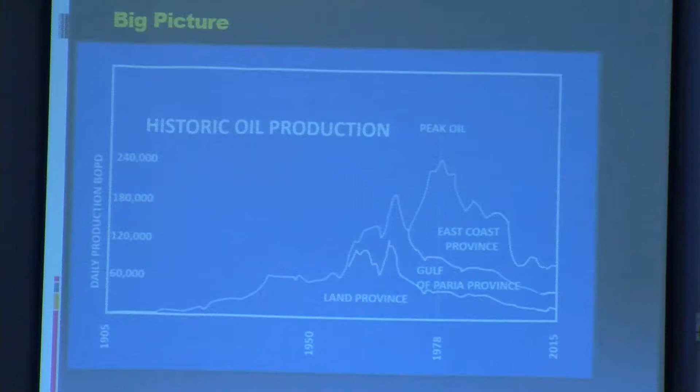But you will see here the latest ministry figures for production in February: 75,500 barrels of oil, of which land produced 22,000, right? Total marine, 53,500, of which Trinmar produced 19,000, and other marine was 34,000. Now, 16,000 of that other marine was condensate. So, in fact, actual black oil production was of the order of 60,000 barrels a day.

Now, if you go back to that decline I showed in the previous curve, and look back just two years, you'd see that in the last two years we've lost 6,000 barrels a day on average, right? So that means that, assuming the same decline rates and we continue business as usual, BAU, in five years' time we're going to lose 15,000. In fact, I hazard a prediction that it'll be far worse than that.

So if you think we're in a crisis today, and we are, what will be our condition four or five years out, right? We will have nothing to leave to our children, and we will have nothing to offer all the young people who are sitting in this room looking for opportunities, not only in the business, but in the country. So we need to do something, and something urgent, right?

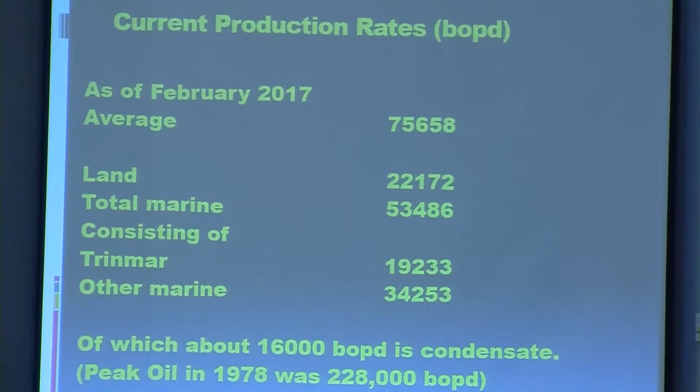Our fields are all mature. Land fields in particular are all mature. Dates of discovery, 1908, 1918, right? So we have to look for technologies which address the mature fields. My presentation will not discuss marine oil fields on the East Coast, right? I will be talking about land and the Gulf of Paria specifically, because that is where our immediate EOR or IOR opportunities will lie.

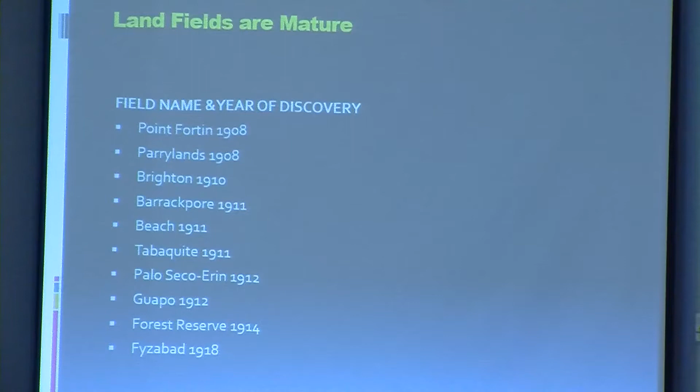And if I use EOR and IOR interchangeably, I'm an old man, and I do not want to get into the semantics of the difference between those two. So please forgive me. As far as I'm concerned, they mean the same thing. Okay?

Now, this is a slide from a presentation we did several years ago, and it is still true today because the numbers have not significantly changed. On land, we have produced to date about 1.5 billion barrels of oil, and I'll show you a little bit of a breakdown of that, right? Gulf of Paria, about 1 billion, and I'm not too worried about East Coast, but total production of oil from Trinidad is about 3.5 billion barrels of oil to date.

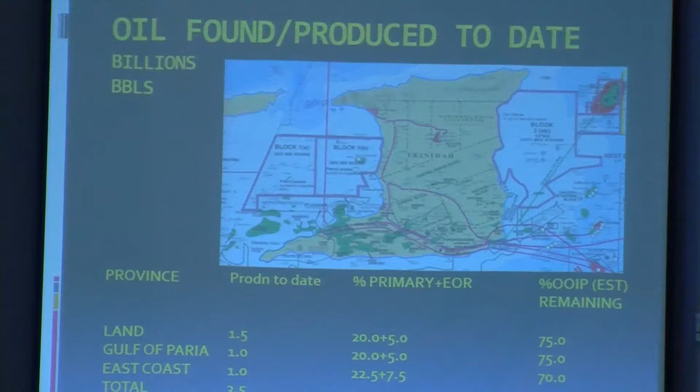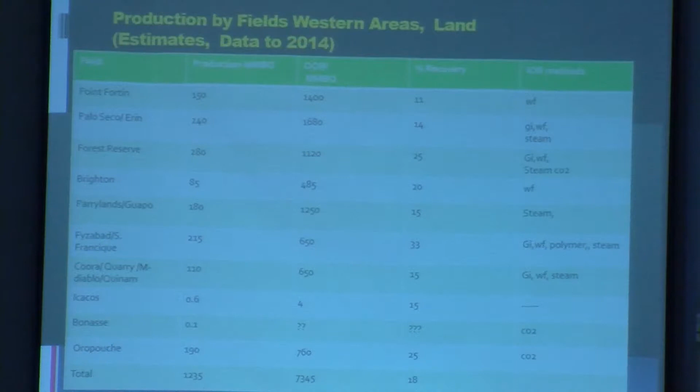And so I'm looking at the western area fields here. Western area fields, and you will see Point Fortin, Palo Seco, Forest Reserve, Brighton, Parrylands, Guapo, Fyzabad, San Francique, Coora, Quarry, Morne Diablo, Quinam, Icacos, Bonasse, Oropouche, right? And our production from those areas amounts to about 1.2 billion barrels, okay?

Our average recovery is about 18%. Some places are higher, some places are lower. And in many of these fields, IOR, efforts to improve recovery, either secondary or tertiary, have been tried. So for instance, in Point Fortin, there was water flooding. In Palo Seco, gas injection, water flooding and steam, right? Forest Reserve, gas injection, water flood, steam, carbon dioxide, et cetera.

Fyzabad had gas injection, water flood, even a pilot polymer flood scheme many years ago, steam injection, and so on, right? In Bonasse we had a pilot CO2. There is a pilot CO2 there, and in Oropouche there was a project as well, right? So we have tried some stuff. Some of these things have worked very, very well. Gas injection worked brilliantly, right?

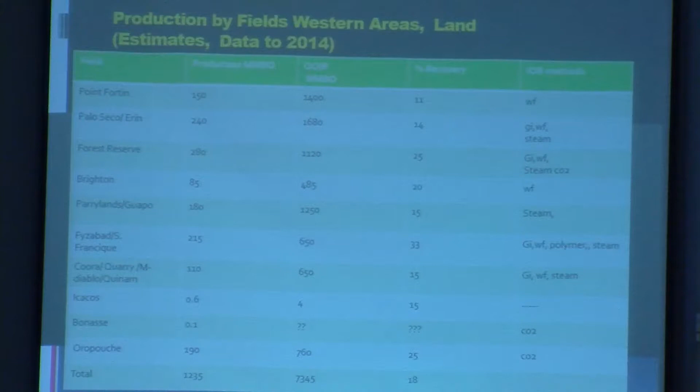When we had gas in abundance to essentially throw away, right? Steam has been, as in the rest of the world, and I'll show that later, extraordinarily successful for Trinidad, right?

Overall recovery is about 21%. What this means is that in both areas of land, we have close to 80% of the original oil in place still. So if we have produced, say, 1.5 billion barrels from land, we're talking about a considerable amount of oil still in the ground available for improved oil recovery.

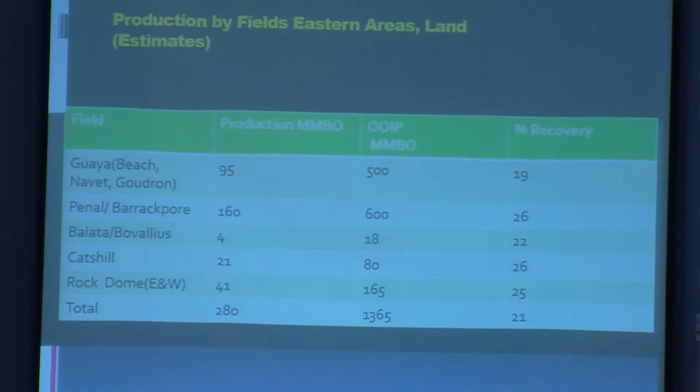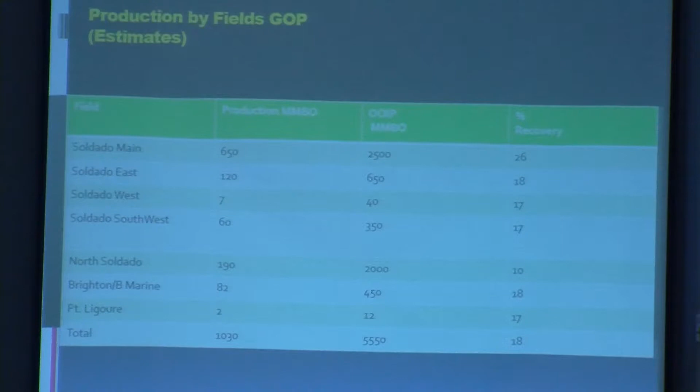Of significance is that most of our oils are, I will say, not asphaltenic. And that is of great significance to EOR. Asphaltenic oils tend to oil-wet the reservoir, first of all. And when we talk about CO2, CO2 deposits asphaltenes in the reservoir if the oils are asphaltenic. So we will have to screen reservoirs for that if and when we have them. We have the capability to do so.

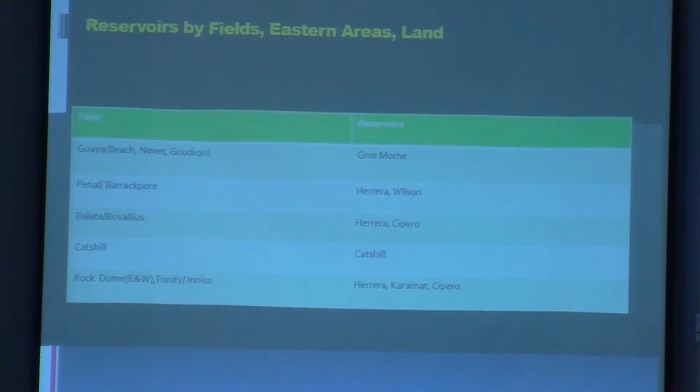As we expect, the oil API gravities will increase with depth. In general, in the deeper reservoirs, the API gravities range from the upper 30s to the mid-20s. That's just a sweeping statement, and that has implications for the types of EOR that you might want to implement. And in the shallower reservoirs, the oils range from the mid-20s down to about 15 degrees API, or even slightly lower in some cases.

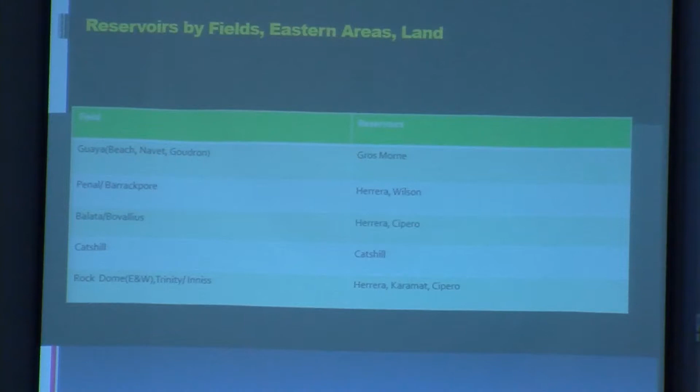I want to talk about the reservoir types, land and Gulf of Paria. Generally, the reservoirs are sand with varying extents of shaliness, and the sands are interbedded with thin layers of shale. That interbedding has implications for the type of EOR techniques that you might try. For instance, there are technologies which require good vertical permeability. If you have interbedded shales, you may have a significant net sand thickness, but not much vertical interconnectivity, which will preclude the use of certain technologies.

Most sands frequently shale out within relatively short distances, in terms of international style reservoirs that extend for thousands of meters or feet, or in some cases miles. And the consequence of that is there's some uncertainty in terms of interwell connectivities.

The shaliness in the sands is generally of the smectite family, with illite occurring in some cases, right? Very little kaolinite, if any at all, right? There are implications in terms of the technologies that can be applied if one is dealing with smectite type clays in reservoirs, and/or illite, as the case might be.

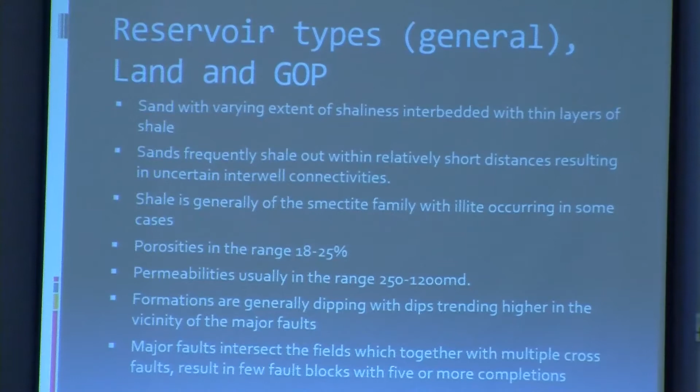So the implications for IOR: fluids injected need to be compatible with the shales in the formation and with the reservoir fluids. Interwell connectivity and reservoir continuity need to be established and tested continually by diligently monitoring injection and production performance, and adjustments must be made as needed on a timely basis for effective IOR performance.

This is grunt work. This is hard work. And if you're not prepared to do that, your IOR projects are doomed to fail from the start. This is not sexy stuff. You've got to be out there taking your measurements, testing your wells, and interpreting the results in the office, right? And you have to do both. More than likely, the same person has to do both, because things get lost in the translation from field to office. And if you don't see these things with your own two eyes, do not believe it.

Again, because we have small fault blocks, single well methods are favored. For example, push-pull for testing connectivity, and there is a side benefit to single well methods in that you tend to get fast returns on your money, right, in terms of production.

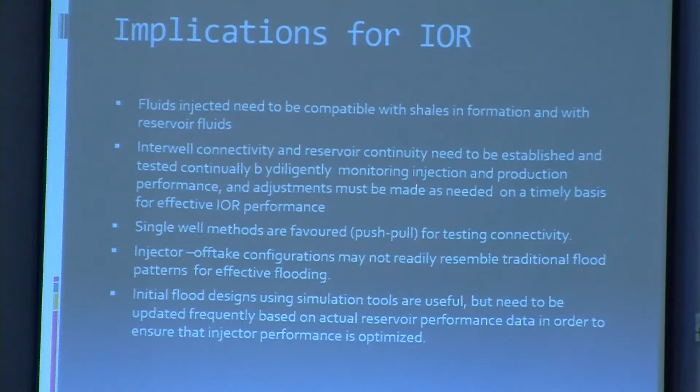All right, okay. In that case, let me close this one and open IOR Methods.

Kippy, Donnie, give me a glass of water, please.

Okay. Here we'll talk a little bit about EOR methods. And this is something that I teach a semester-long course on, or have taught semester-long courses on. So to think that I will cover this in 20 minutes and do justice to it is being exceedingly optimistic, right? Necessarily, this will be a cursory view, but there are some points I want to make coming out of this talk.

So you can't see this as well as I had hoped you will, but we're talking here about chemical methods, thermal methods, and essentially methods using gas, which could be miscible or immiscible. So right down at the bottom, which is recovery methods, right? Secondary or tertiary recovery, we're talking about chemical, thermal, or gas methods. And just above that is secondary recovery, which uses either water flooding or pressure maintenance, which is essentially injection of natural gas into the formation.

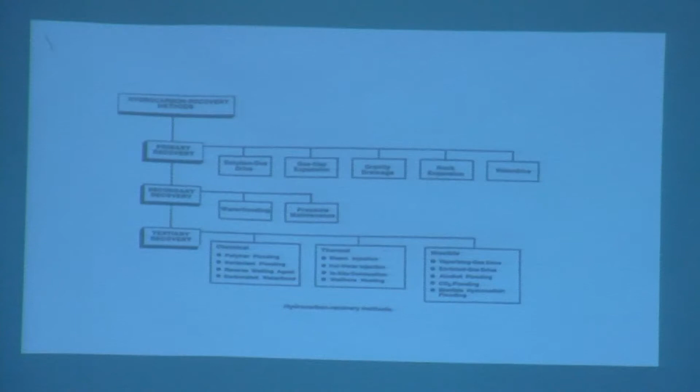Dr. Prasad has stolen this slide for use in his previous presentation. So if it looks familiar, we share an interest in the same things.

And essentially, again, what you're seeing is water flooding, in terms of cost, total recovery, thermal, polymer, CO2 injection, and surfactant use. Excuse me. And you'll see that these things can increase production recoveries by 30 to 50% above primary, depending on the technology that you use.

This cost curve needs to be updated, but you'll see, among other things, that surfactant, which is one of the chemical methodologies, tends to be very pricey, right? CO2 injection is shown here as being very pricey in some cases, low to high price, right? And the reason for that is that in some places, in the US, in Canada, they have to drill for CO2. In some cases, clean it up, then transmit it hundreds of miles, sometimes across the border to a different country, through pipeline in order to conduct a project.

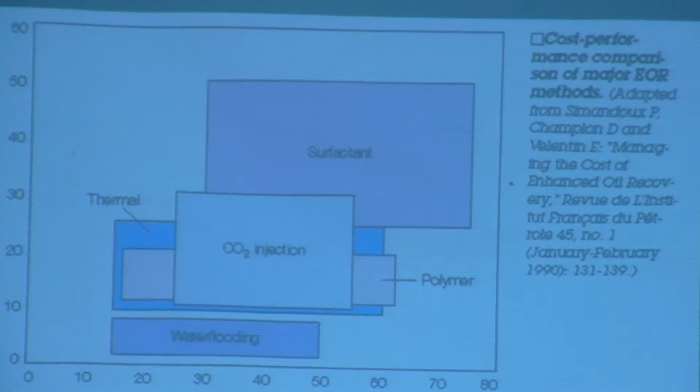EOR is big business worldwide, right? Total EOR worldwide is about 2.5 million barrels a day. And these are some old figures, this was Larry Lake in 2010, so that has increased since then. The Chinese are aggressively increasing improved oil recovery. Venezuela, despite its difficulties, is increasing their own. The USA is increasing as well. Indonesia is increasing. Everybody is on the increase except Trinidad and Tobago. We are out of the loop, and I'll show you that we should not have been.

Thermal methods. In thermal methods, we use heat to produce heat in the formation, and what it does is it reduces the viscosity of the crude, vaporizes some of the oil, right? And it improves the mobility ratio for those of you who understand that term, and we'll talk more about that at a different time. So essentially, two major methods of using heat are cyclic steam injection and steam flooding.

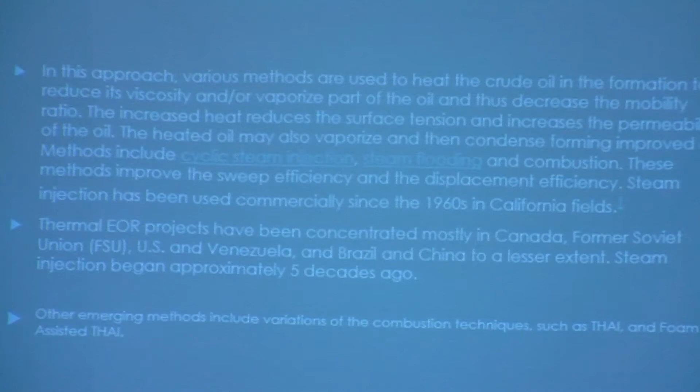So this is a quick slide of the steam huff and puff, or cyclic steam stimulation. Essentially what you do is inject steam into a well, a single well, right? You're not interested in connectivity and so on here. All you're interested in is: is there enough oil in the reservoir? Thickness and saturation, basically. And you shut the well in for weeks, a few weeks to maybe a few months, right? And then you open back the well.

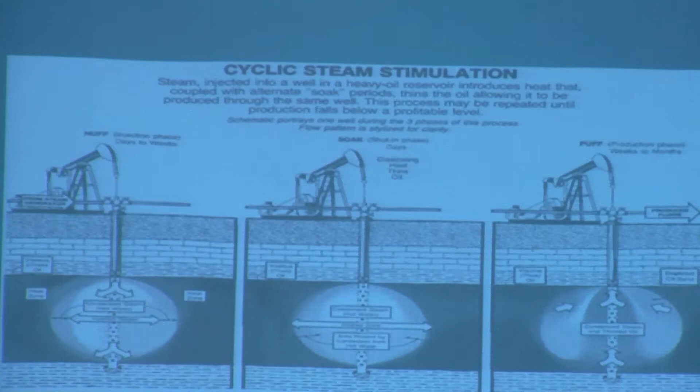Typically, results are that you will get back rates up to 10 times what your shut-in rates were. That will last you for several months to into years, depending on the quantity of steam that you've injected and, of course, things like the reservoir thickness and so on. Okay? So that is a very successful methodology that has been used, and it has also been used to evaluate fields for continuous flooding, and it has also been used, of course, on its own for small reservoirs and stuff like that. I will jump the gun a little bit and tell you there is a very parallel process for carbon dioxide, but we'll get there when we get there.

And steam flooding essentially is injecting steam into one well, off-taking production in an adjacent well, and you form a steam zone around the injection well, hot water zone ahead of it, and that sweeps oil due to the lowered viscosity and some vaporization and so on. And of course, the addition of mass at one end will move mass forward to the other end into a production well where you get hot oil, right?

These projects, I will show, have produced in Trinidad to 1995, which is the last complete evaluation of all the data that I have, over 75 million barrels of oil. Over 75 million barrels of oil from the various projects to 1995, and of course that number will be somewhat higher at this time. For the injection of between 2.5 to about 5 barrels of steam per barrel of oil. So if we have a reasonable way of producing steam at a fairly low cost, then this can be a very economic process.

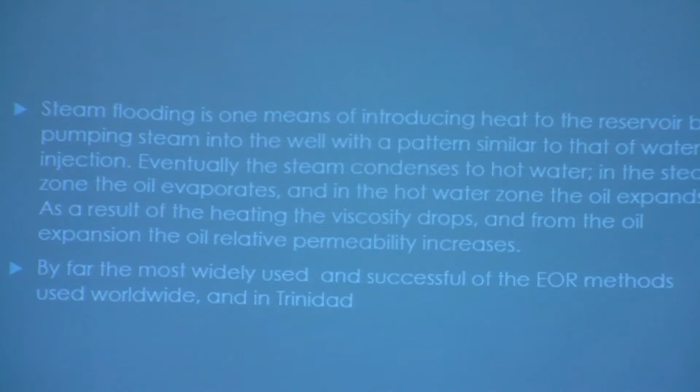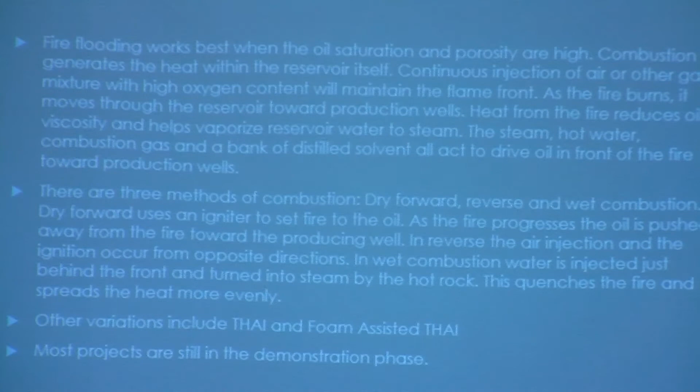Fire flooding, I've talked about fire flooding and its variations, including toe-to-heel air injection and foam-assisted THAI and stuff like that, right? So I won't, wow, I'm behind the curve, right? So we've talked about those, and I will just stay away from that. I don't want to spend my time discussing that. I've already advised that that is not a way that we ought to be thinking of at this point in time. There may come a time when that becomes something we want to consider.

Chemical injection, right? Using various chemicals to lower surface tension. Using alkaline or caustic solutions. They have organic acids in them that create soaps. They lower interfacial tension, right? And you may or may not use a polymer solution to chase the chemical solution. I will not go through the slide in detail. You'll get copies of it later on and you can read it.

What happens, though, is that for each reservoir configuration that you have, configuration of reservoir fluids and reservoir rock, you need to tailor these solutions exceedingly carefully. And part of the problem is that these solutions get adsorbed or interact with the rock. You have a lot more rock surface than you have fluid surface. So this process gets expensive pretty quickly. And you consume your chemicals, and especially in cases like ours where we have poor interwell connectivity, you can lose fluids into places that are not going to yield you anything. There's a time for this later on. There are better things we can do with our time and money now.

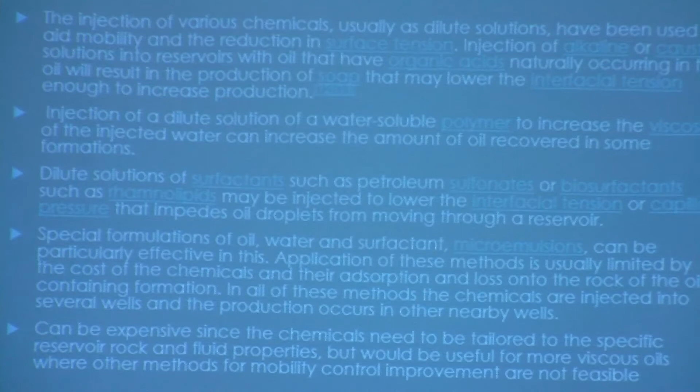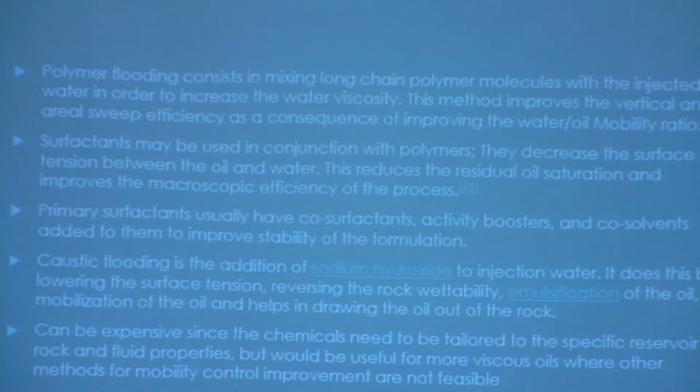Polymer flooding, we heard about polymer flooding, right? Back in the 1970s, we had a pilot polymer flood in Fyzabad. It did not succeed. In fact, it was the subject of the master's thesis of somebody who became CEO of the company that had tried it. And part of the problem, again, is exactly that. Surface activity and the formation, adsorption of the chemicals and stuff like that.

So again, the polymer and the blends of whatever and the concentrations have to be adapted very specifically to the reservoir. You have to do a significant amount of pre-work in order to tailor this thing right. And then you have to monitor it very, very diligently in order to ensure that you are getting the right things to happen.

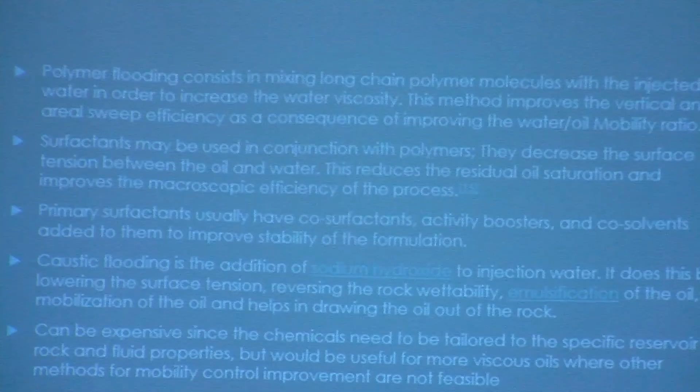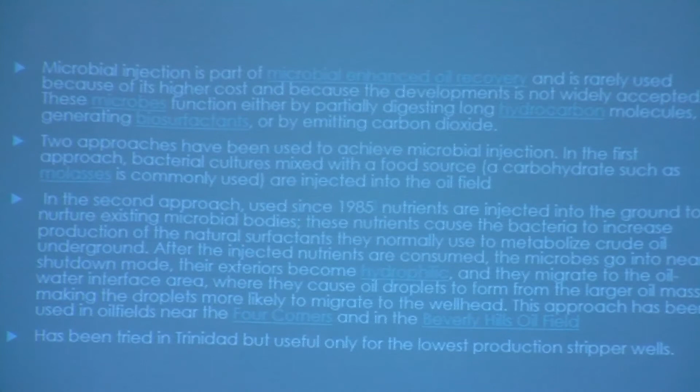Microbial injection. Microbial injection, we have tried it in Trinidad. In fact, many, many years ago, when I was a not so young reservoir engineer, Professor Moses from Imperial College came down and we spoke about microbial injection.

And the case studies that he had indicated were in places like Romania and so on, where production per well was of the order of 3 and 4 barrels a day. And as a result of microbial, he was getting 1 and 2 barrels a day increase. I think the same kinds of results were obtained in our field trials in Trinidad. There may come a time when we need to do that, right, I will probably be long gone. Okay? But I don't think we need to look at this technology at this point in time.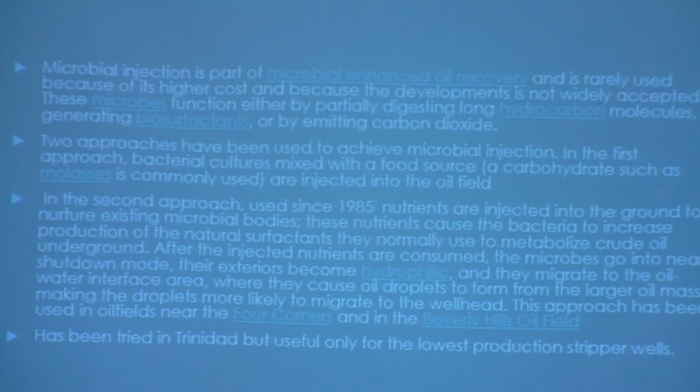A new technology that is emerging is something called plasma pulse. I know very little about it. There is very little actually in the literature, although in Trinidad right now, this is a technology that was developed in the Soviet Union. And people like ConocoPhillips, ONGC, and a couple other people have been trying it. There are people in Trinidad walking around who want to peddle the technology, right? And it's worth looking at, I would say, right? But I wouldn't bet too much on it at this point in time.

It may turn out to be much better than I think, but it seems to me to be a near wellbore phenomenon. From what I've read about it, it's a near wellbore phenomenon. So it is not something that, you know, is going to affect us on a very large scale in a significant reservoir system.

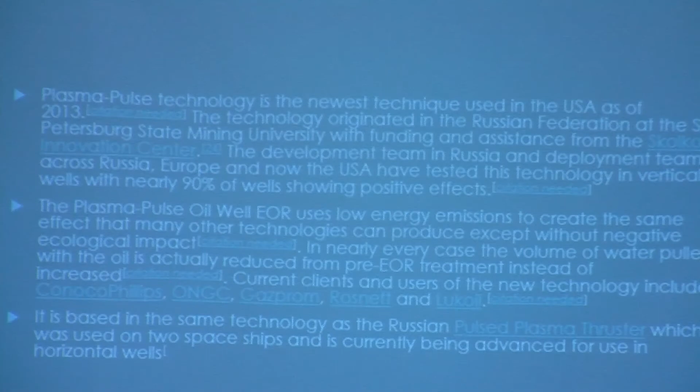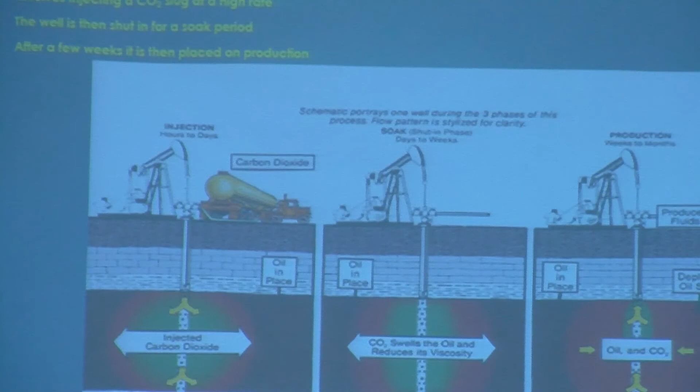I will talk about carbon dioxide later on. So this is just to whet your appetite, carbon dioxide stimulation, huff and puff, which is very analogous to the steam huff and puff process that I showed you earlier. You inject carbon dioxide into a single well, you soak it for a couple of weeks, and then you produce a mixture of carbon dioxide and oil, with results fairly similar to those that you have from steam.

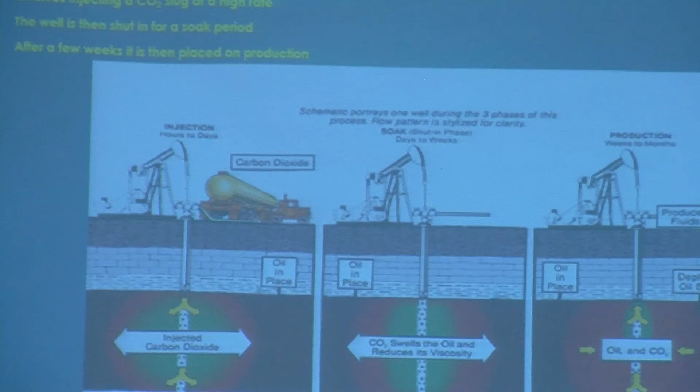We have tried this successfully in Forest Reserve with very good results over the years. We had to stop that because of lack of a supply of CO2. There are a couple of modes of carbon dioxide injection, huff and puff, miscible and immiscible displacements, right? Both miscible and immiscible floods can be conducted with or without the injection of water to aid CO2 mobility control and increase the efficiency of CO2 utilization.

At this point in time, I will again preempt what I'm going to say later on and tell you that efficiency of CO2 utilization is not a major concern to us at this point in time. It will become so later on. Okay? But if we have large supplies that we are blowing to atmosphere, right, we need to get on with the business of injecting that thing into the ground, right?

You know, the efficiency of a motor car engine is about 28% now. Well, it started at 18% in the early 1900s. And after more than 100 years of improvements and billions of dollars in improvements, we only improved the efficiency of that engine by about 10%. Right? So efficiency is not the driver, it's the effectiveness that we want. And we have to look at that.